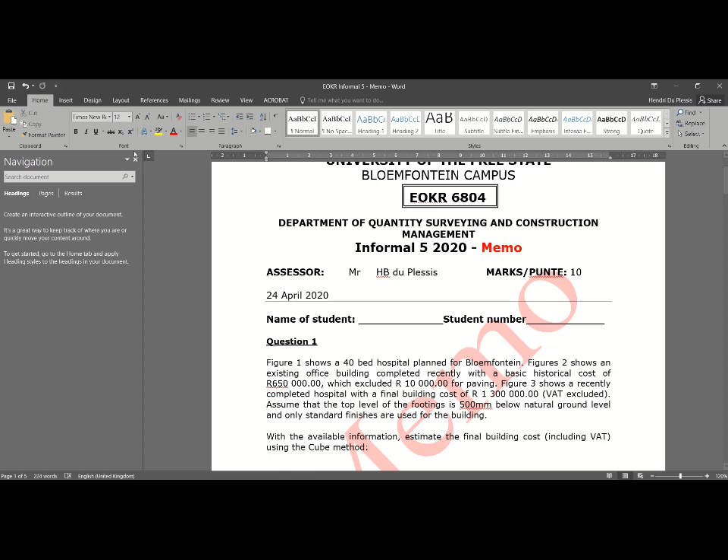Okay, hello everyone. This is just a video on the Informal 5 that you submitted last week. So I'm just going to run through this and try to explain how the calculations were done. And you will also have this document in front of you.

So you were given three figures, three drawings of three different buildings. Firstly, we had a new building of 40 beds planned for Bloemfontein. Figure 2 shows an existing office building completed recently with a basic historical cost of 650,000 Rand. I tried to put in the basic historical cost here to show you that there's a difference between the basic historical cost and the final building cost that I'll explain a little bit later on.

I wasn't too strict on recognizing this difference because we haven't discussed this yet, so I didn't mark with this in mind. Also, I did find that there were a couple of students who actually did recognize that, and yeah, I was quite impressed with that. You will see in your feedback with regard to that.

There were about 3 or 4 that recognized this. Unfortunately, there were some other mistakes in most of those submissions. So just have a look at that. If you do have queries on this specific item, you can just mail me, and then we can have a chat about that.

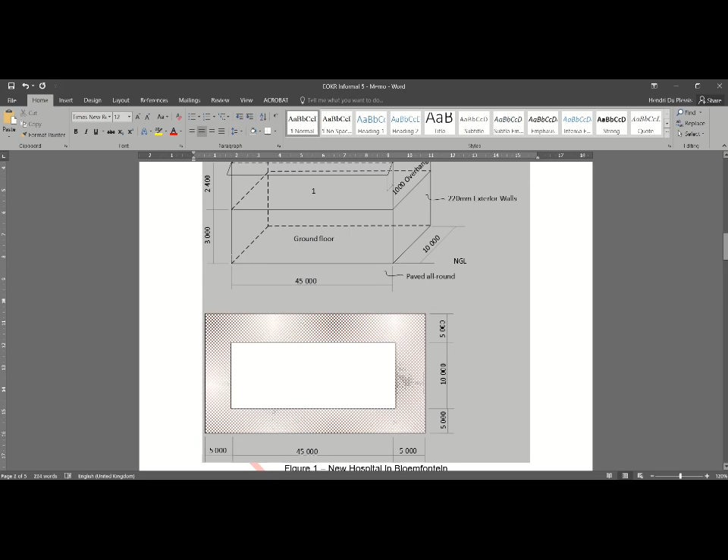So you would see that we've got a total floor area of 45 times 10, and I had the question on whether you can use a single story building, comparing it to a double story. Yes, in this instance, that was all that you had.

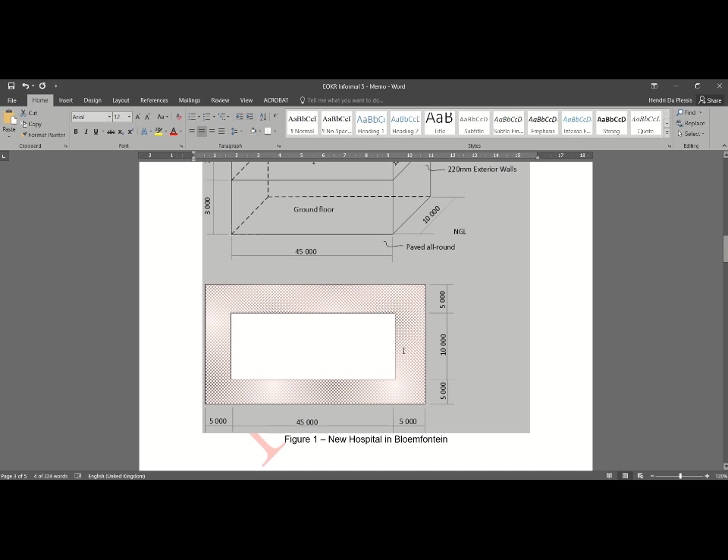If you do have a double story building, it's always good to compare the cost between your ground floor and first floor, if you do have that type of information. But with this question, you didn't have that luxury, so all that you had to do was basically use the cost that you would calculate from figure 3 and times that with the volume of your figure 1. So just keep that in mind.

Also, you would see that we had some new external paving that was added. I didn't add any external works like pipe work and groundworks and so on, just to keep it simple. Otherwise it just becomes too much to calculate. But you will see as I go through the calculations with regard to that. Obviously, if I do include some other items, you need to take that into account. But usually in a test, that's too much information to try and have in one specific question.

So that was excluded. So the only thing that you had to do was to calculate your volume cost and then add your paving area as well, so that you can actually get to your basic cost to which you can add your P's and G's, and then your contingencies and VAT. Okay, so that was that.

Then drawing 2 or figure 2, your historical office building. The only purpose of this building was to calculate your paving area. So you didn't have to calculate the volume of this, and you would see there was a couple of catches here anyway with the wall plate height, the ceiling height, and so on, which all differed, which I think many of you guys took cognizance of. Just be aware of that. That might be a thing in other questions, to actually use the correct height.

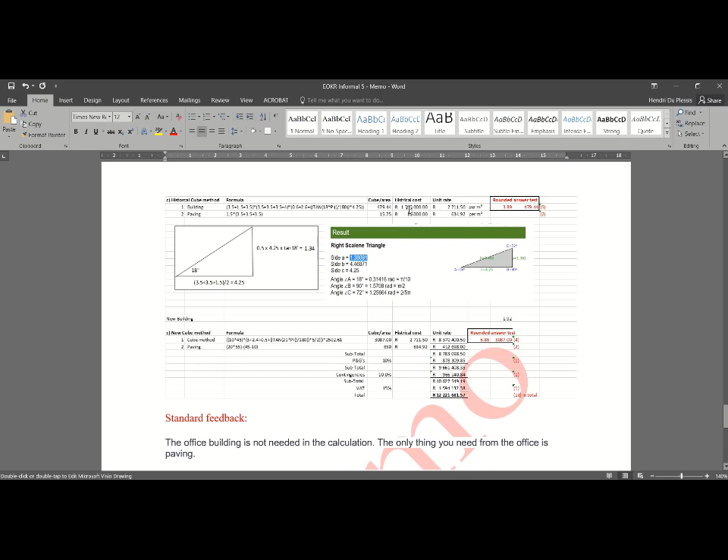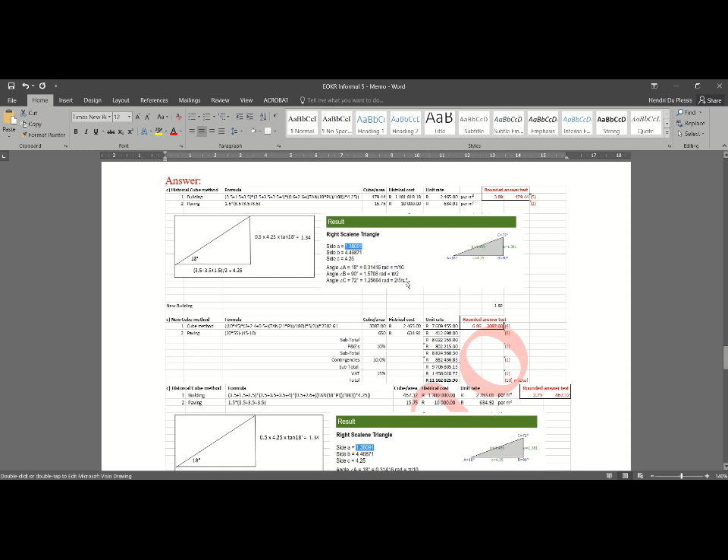Okay, so in the next clip that I'm going to show, I'm going to use the 1.3 million because it's just easier to calculate, but you can have a look at the 1.1 million that I calculated here, how that was done. I'm going to explain that in the next clip, and also in the next video with the next method of calculating your new building estimates. Okay, so just be aware of that.

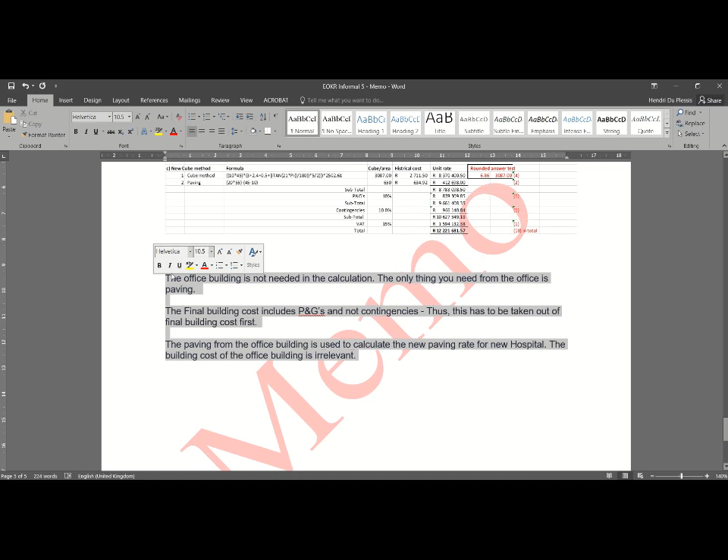And also then I just added one or two basic feedback items here at the bottom so that you can just see one of the common things that was asked. So in a nutshell, that's basically how the memo works.

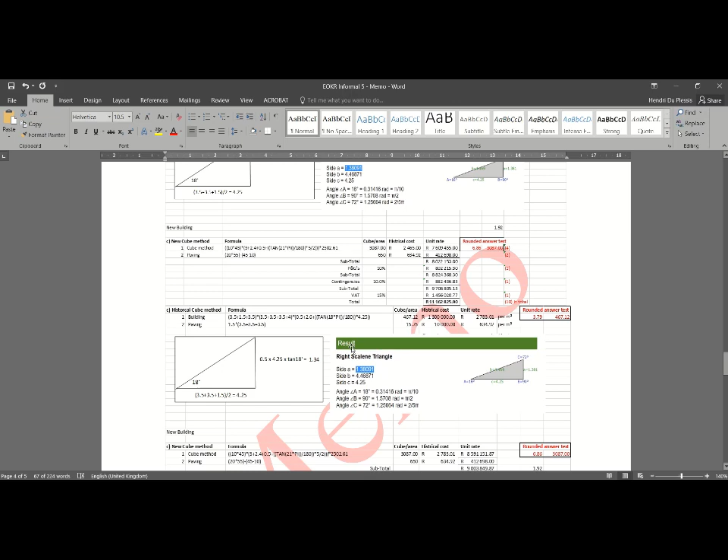Okay, so let's get into the calculations. Firstly, our historical building: you would see that the memo shows you basically the following, and you will see that I've added how the area was calculated first. That is times with your total height. So you go to your drawing.

So the first applicable area or volume that you need to calculate is your figure 3. So you would see this is the 3.5, 1.5 and a 3.5 added together times your length. So it's your length times your breadth, and you would also see that the information actually showed your wall plate height as 2.6 here,

and also your top, or your excavations, the top of your strip footing is calculated by subtracting the 200 millimeters here from your 800 millimeters here. So you couldn't use the 0.8. There was one or two students who actually used the 0.5 instead of the 0.6. So just make sure that you do read your question thoroughly whenever you do that.

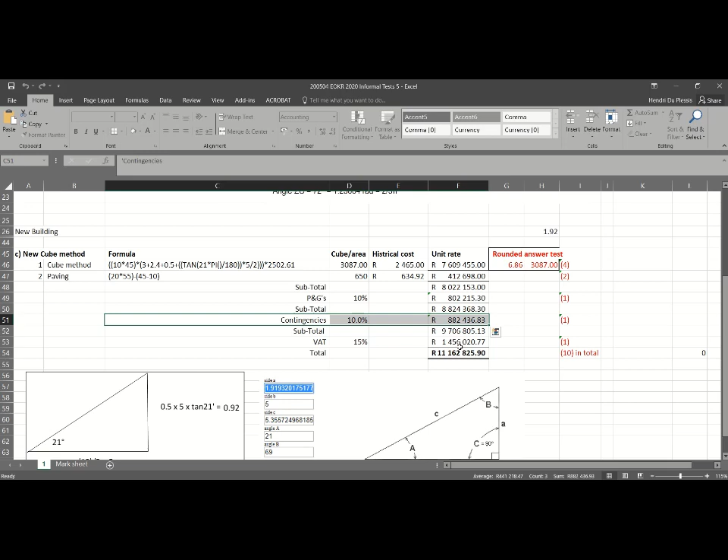And then we get to the little catch that was in the question. I think this was a bit harsh to include, but you need to be able to distinguish between your basic building cost and your final building cost. Your final building cost always includes your P's and G's, your contingencies, and so forth. But for your historical building, that building is already completed, so contingencies are not applicable, because the final account has been completed, and thus there's no provision for any unknowns. So that was the final building cost for that building.

Okay, so just a note of that. Whenever you do this calculation, please make sure that you use the same rate for your P's and G's that you subtract here at the bottom. So I've used P's and G's of 10% here as explained earlier, so I need to subtract 10% here again. Also, please note that little explanation of how to subtract your VAT and any other percentage. So please make sure that you understand that.

Okay, but what I'm going to do is change this to 1.3 million, just to make the calculations easier, and most people actually had used 1.3 million, which is fine, and I think that was a good way to start.

You use your 1.3 million and you divide that basically with your cube area method that you've done. Okay, so that is that, and then you've had to calculate your paving as well. So from figure 2, you didn't have any paving in your historical hospital that you had here, thus you had to calculate paving somewhere else, and that's why I included this figure to actually assist you with that.

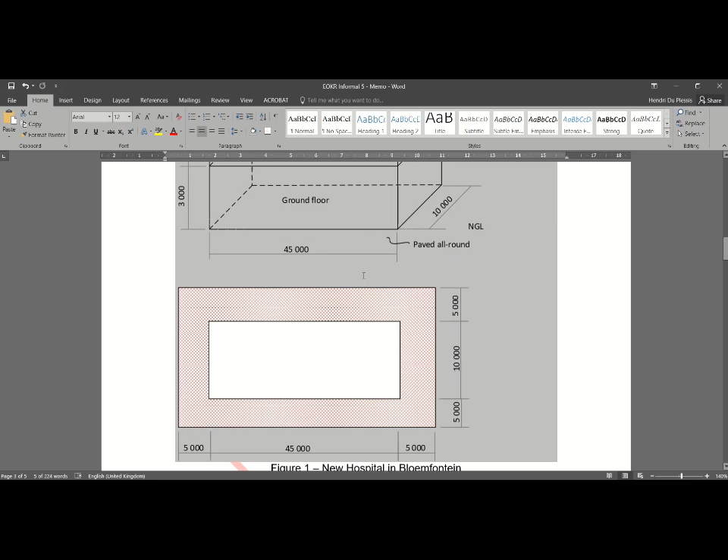Okay, so again, make sure what is included in your basic cost and what is included in your final building cost. So a little bit of a trick question if I do ask that, so just be aware of that. Okay, so then basically just divide your 10,000 by the 15.75 to get to your 634 rand per square meter. And that's basically how you calculate your historical data. So in the next clip we're going to apply this to our new building.

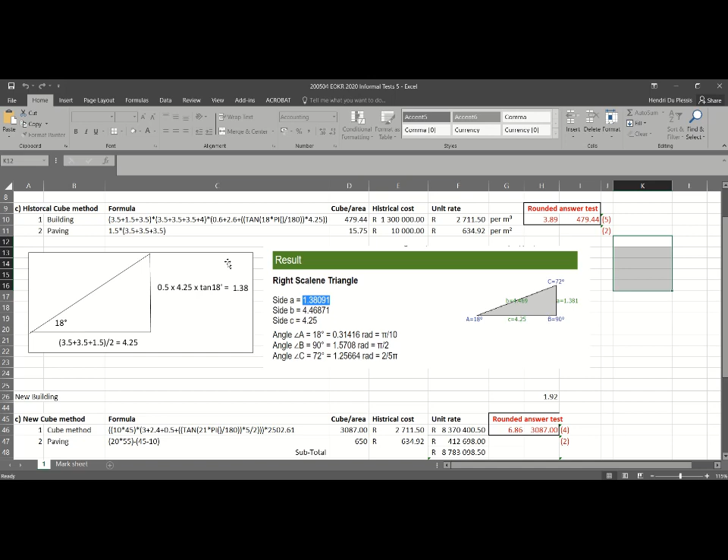Okay, so here we go. Now we can calculate our new building. So you would see it's the 10 times the 45 meters to get your total floor area. Just remember it's only for your ground floor because you're timesing it with your total height. So do not use your calculation for both floors to times it with the height, because then it will be the same as doing it for two buildings.

Why I'm saying that is sometimes I do ask to calculate the final cost using the square meter rate and then the cube method to compare the two, and then students may use that calculation that you did for your square meter area. So just be aware of that. Do not take a short route when calculating your volume. Okay, so your 45 times your 10 for your square meter of your hospital.

Then you've got your height that you calculate, which is your first floor plus your second floor plus the bottom or to the top of your strip footing, and then the middle of your roof calculation. I've added here the cheat sheets again, from which I just did this little drawing so that you get to an answer of 1.92 and you divide that by 2. So here I've just done that to make sure that the rounding off is correct, and so it's a 0.5 plus 2.4 plus the 3 plus the 0.96.

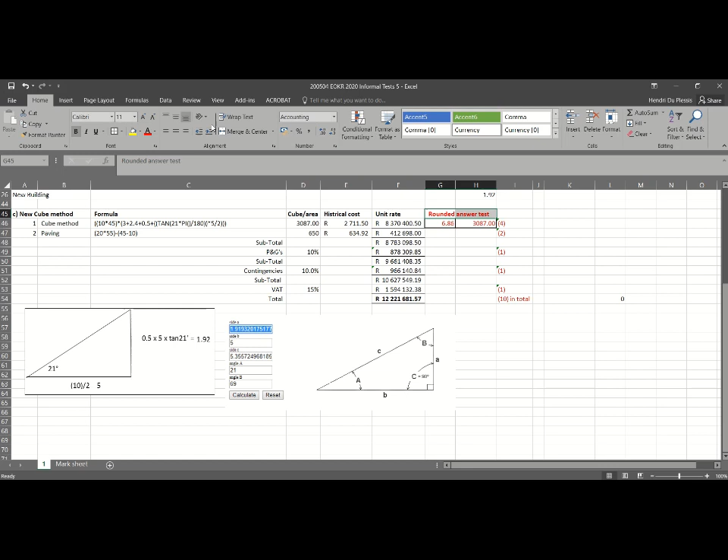Okay, and now I see it's just given it in rand, so I'm just gonna quickly fix that. There we go. Okay, so that looks a little bit better. Okay, cool. Looks fine like that. So just be aware of that, that's not rand.

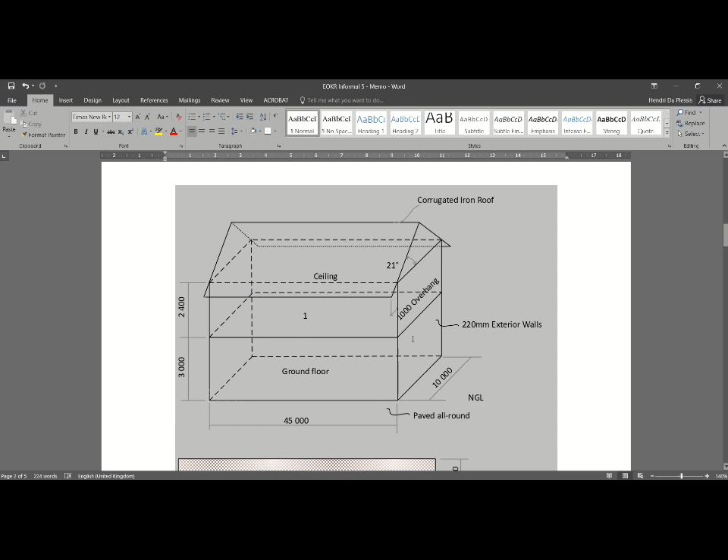So your height, if we just go back to our drawing, you will see there's the 3, there's a 2.4 up to your wall plate. Here you can actually see nicely how to calculate your triangle. If you're in doubt, for instance, if I give you the ceiling height and then you have to add another 400 millimeters for your beam filling to get your wall plate height, always draw it out if you're a little bit unsure, just to see what it's asking and how it actually works. I think everything should be straightforward from there.

Then you calculate your area, and you get to your volume of 3087 cubic meters. Then you take your rate that you calculated previously, you times those two together, and then you just add your paving to that to get your total basic cost. So from your basic cost, you add your P's and G's, add your contingencies, then you add your VAT, and so on. Okay, and that's basically the calculation. This last little bit counts about 10 marks.

So it's again that for your cubes that you have to calculate, and then using your historical data. Then this was just using those two. So this is a little bit of bonus marks, these two, and then I just added 1 mark for actually doing the calculation correctly. I think there's a little bit of a mistake here, so this should actually be 1 there as well if your answer is correct.

Okay, so many of you would have used P's and G's of 8%, so I would have put that in there, and many would have used 2.5% here. And then I can just work with the percentages that you actually used. So that's why I leave it open sometimes, and why I'm not too strict on what percentages you use. Although I would like you to use 10% here, because it's usually more realistic in practice, 10% here and 10% there. Okay, so I'm just going to change that back.